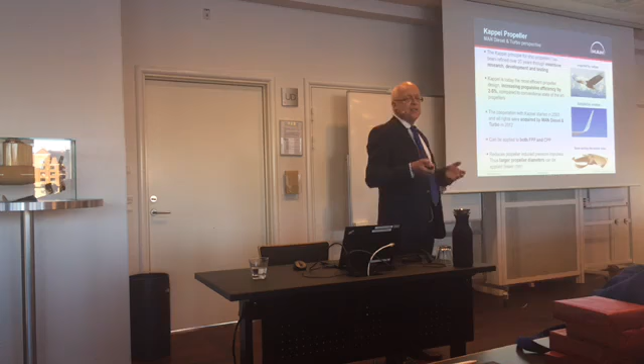I think one thing worth mentioning from our point of view is that until 2010, we were solely focusing on CP propellers. We were not on fixed pitch propellers. So that was also a way to get into the fixed pitch propeller. If we had come with a conventional fixed pitch propeller, it would be so hard for us to push through. But with the Kappel propeller, that was absolutely the right time, the right invention and the right product, I'm sure.

It has been mentioned here before that the pressure impulses, it was shown also by one of the applications from Kappel, that we would have lower pressure impulses, which can then be translated into an even bigger improvement in efficiency. And this is done by going for less tip clearance and bigger propellers, and that would be a secondary effect, you can say.

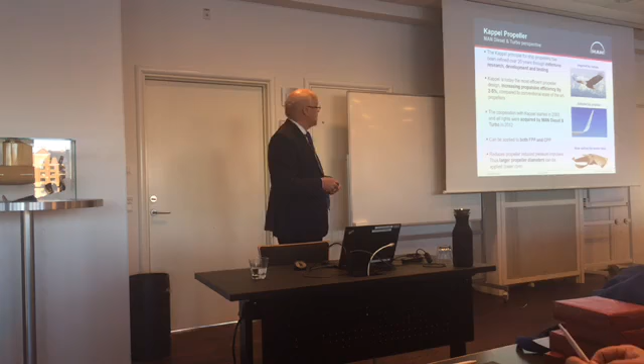This about the CLT propeller can be explained by equations, as shown by Paul here before, or you can take some kind of an analogy. Most seem to be familiar with the aircraft, where you have the lift distribution on the wing. And as we also saw, the winglets are coming, and what they are doing is actually reducing the loss of lift on the wing. In aircraft theory it's called induced drag, but it's actually not drag. It's a loss of lift, and the winglets are preventing that loss of lift.

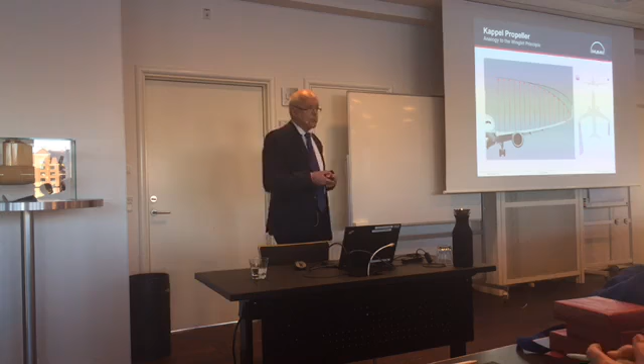And that can be seen also as vortices being shed from the propeller tips, or the wing tips in this case. And that analogy we use the same way for the basic principle here. The lift distribution will be such that you would have more lift for the same diameter and blade area ratio.

Then comes this question about the geometry. We have to communicate our geometry to the manufacturers of our propellers, and I can tell you this is a problem every time. We have manufacturers here in Europe, and we have some in the Far East. And first, I can tell you, it takes 2 days to convince them that it's a special geometry. Because they say, okay, why can't we just combine it with a skew and with a rake and everything? Why can't we make the same geometry? But the geometry is completely different.

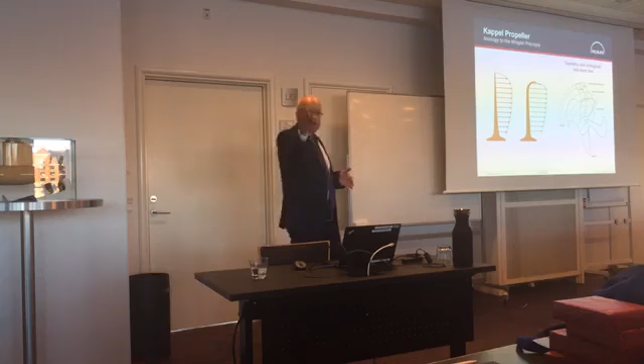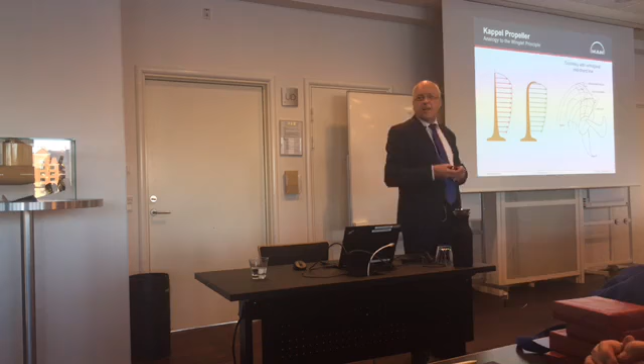As already shown, it cannot be combined with the usual means as with conventional propellers. So, after 2 days sitting with a Japanese or a Korean or a Chinese, they finally figure out that's the case. And if you look at the geometry, you see, of course, a conventional versus the CLT propeller. The difference, as we already know now, is in the tip region.

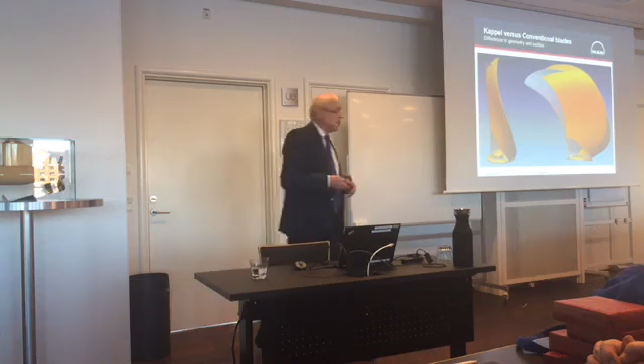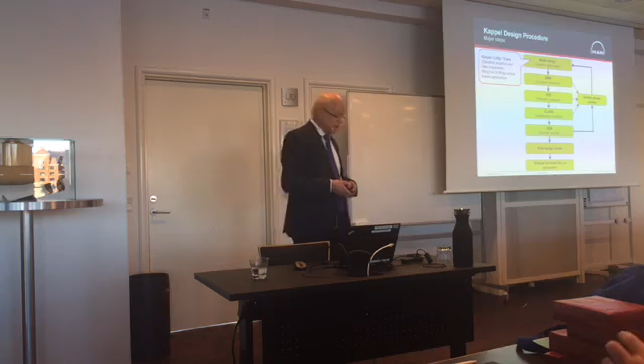Then to the design procedure. What you see here is a flow chart of how we usually do it when we make a design. First of all, we have the blade optimization, which is step number 1. We have a number of software programs that are taken over. LiftP and Trace are some of Paul's programs, which Kappel also used. Then we made ourselves a Casper program, which is a geometry input file, so we can very fast generate different geometries. In principle, you give some input parameters, and out comes an optimized lift distribution, an optimized propeller.

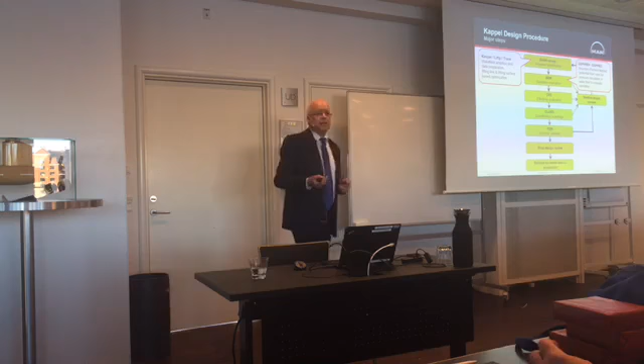The next step is then the S-Pro program, which was also shown by Paul, which is a boundary element method for potential flow. But the main purpose from our side is that we calculate the pressure distribution, and thereby also calculate where there is a danger of cavitation, and also the extension of cavitation.

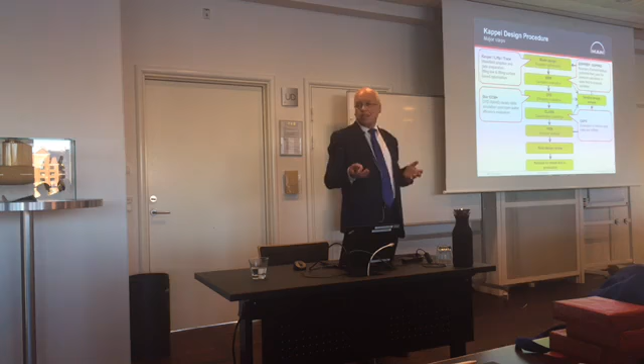Next is also the CFD side. We use the Adapco, I should say Siemens now, CFD code, mostly for steady analysis and open water efficiency at this stage. I'll come back a little bit to that. And finally, we have the classification society. That's mostly the basic rules for dimensioning and scantling of the propeller. That is done by, again, a software package we have developed in-house. Finally, there's the finite element design, where we actually put the hydrodynamic loads and the ice class loads on it, as you'll see in a moment.

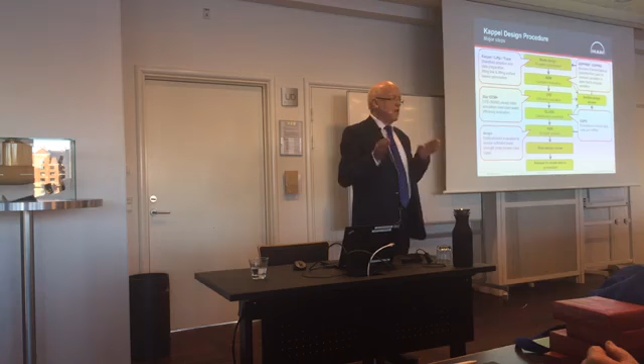And this is not a one-way passage. There will be a number of iteration loops, either breaking off here or here, and then we go through the different stages. And then it says release for model testing or production. In almost all cases, we will have a verification test at the very end. That is a self-propulsion test, open water test, of course, and cavitation testing also.

So, a bit about the SPRO program. We use it for cavitation analysis. There's not a cavitation model built into this one yet, but we just saw the first attempt made by one of our employees here, who's working on a PhD on a cavitation model for the SPRO model. And we're going to take that into use, of course, as soon as it's been tested.

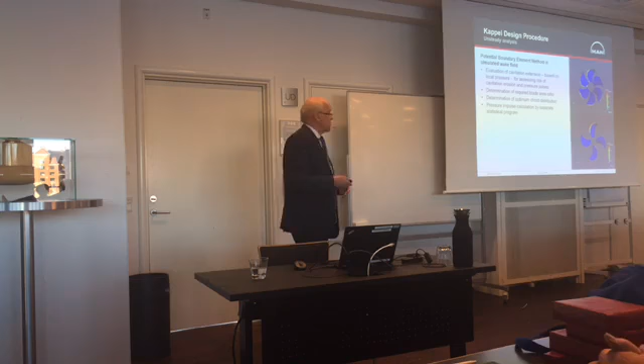Otherwise, we would use it to see if the cavitation is too much or too little. If it's too much, then we have to increase the blade area ratio; if too little, then it's the opposite, vice versa. It also gives a good idea about the chord distribution. You can move the chord in such a sense that you get less cavitation with the same blade area ratio. But the pressure impulse is still calculated using a statistical program. That's a program we've had for many years, which includes a number of modifications from our side.

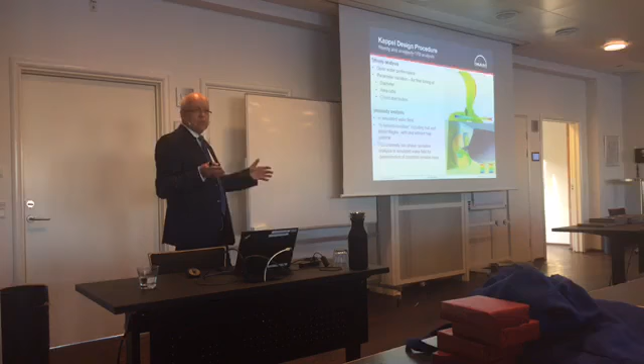CFD, as I said, is mostly steady state. We use it for open water and in the design phase, and we use it to fine-tune some of the parameters like the diameter. Typically we would have a specification that gives a propeller diameter of a certain dimension. But at this stage, we have all the information which we do not have when we first size the propeller. So we actually see whether a bigger or smaller propeller diameter would give an additional improvement.

And then we go back to the customer and say, okay, we would propose that you increase the propeller diameter by 100 millimeters, then you can gain X% in efficiency. So that's a part of it. The same goes for the area ratio, mostly from a cavitation point of view, and again of course with the chord distribution.

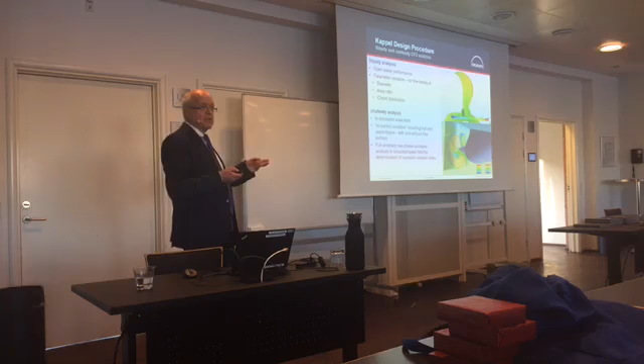The unsteady analysis. There are two ways we use it. One is with a simulated wake. This is a method actually devised internally in our company for how to apply a wake field. That's a problem with CFD calculations. But we have a method, and we use that in the design, especially to look at flow details in the tip region, or wherever we find it of interest. We could also have a complete behind-the-hull setup, including appendages like the rudder, and it could also include some kind of upstream flow devices.

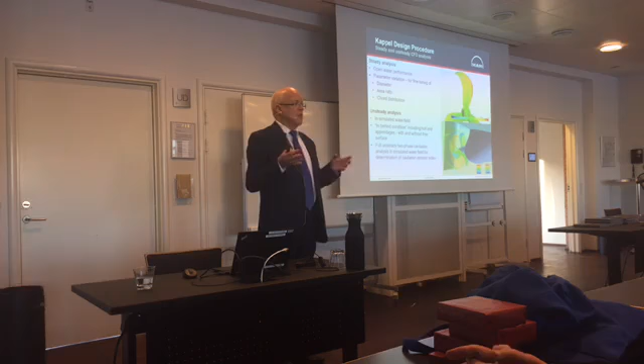And finally, we have an unsteady two-phase cavitation analysis, which is also done in a simulated wake, for determination of the erosion index. That is the best tool I've seen so far in determining erosion. It gives a clear indication of whether erosion will happen.

Finite element calculation is the next step, and there we have to consider both the hydrodynamic load and ice loads. The design of propellers and propeller blades is not from a static point. It's a dynamic component with dynamically varying forces. So you have to consider fatigue. If you look at the stresses in the blade, the maximum stresses from a static point of view are only something like 1/10 of the tensile strength. So it's a pure fatigue analysis we make from the hydrodynamics.

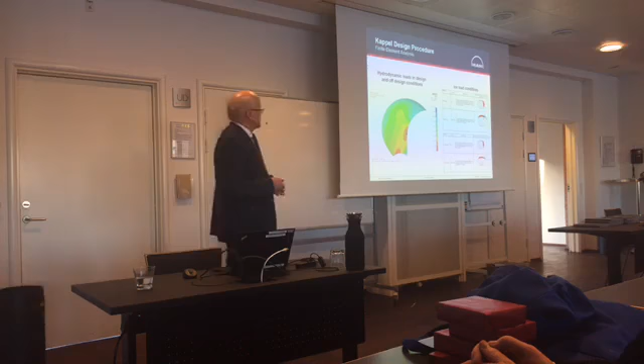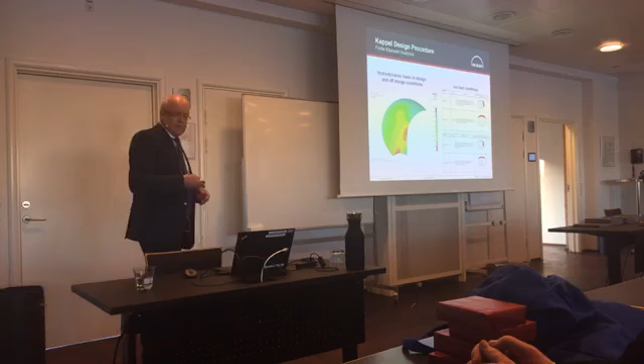Same goes for ice loads. Most of our propellers actually have ice class, so we also have to fulfill these requirements, which are set by classification societies, with different ice loads depending on the load cases. So in principle, having satisfied all our conditions for the design, we are ready to go to testing, and after successful testing, we go into production. Here there is a standard, ISO 484, which governs the whole manufacturing of propellers.

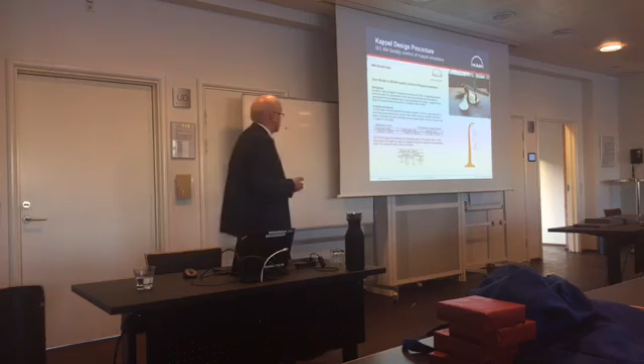However, that is based on conventional propellers. So first of all, we had to come up with our own solution, and we did that by issuing what we call an amendment to this ISO norm. And not only that, we have also supplied our manufacturers with a software tool where they just input their measured values, and then it immediately measures them against the ISO norm and our correction to the ISO norm.

After working sometimes with a Kappel propeller, we found that it could be combined with some other efficiency improving devices, actually quite successful. Some years back, we looked into what could actually be of interest here.

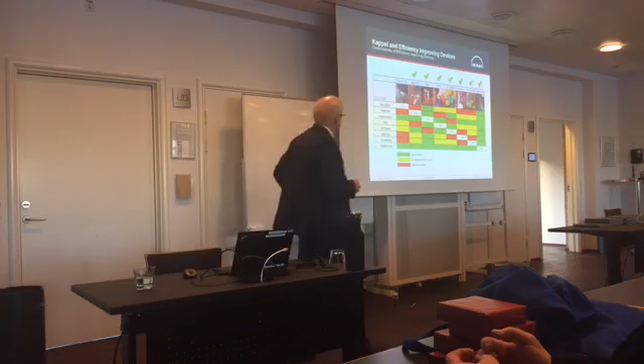As you see here, we practically tried them all. We still miss this post-swirl fins, but the others we have tried also in model testing and full scale as well. If you look in the diagonal here, you see the expected improvement in efficiency by combining the two. Looking especially at the copper color and the green color, that will be an indication that it goes actually well with most of them.

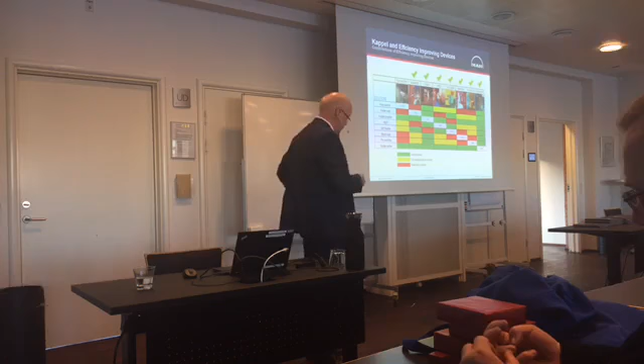So when you do this kind of combining of efficiency improving devices, you should ask yourself the question: first of all, can they be combined? Secondly, can you then just add the efficiency improvement that has been given by, let's say, the inventor or the manufacturer of these improving devices? And a good sound principle, I think, is to tell yourself: don't try to recover loss more than once.

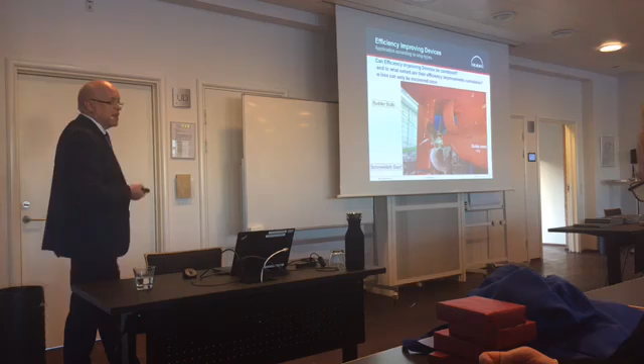So we have seen this picture you see here. It was probably given by a naval architect from a German shipyard once. He said, see here what we tried on the last vessel. Yes, I said, but this is our propeller. Yes, I know, he said, but you never told us you fitted those efficiency improving devices. So of course, this is a lesson to be learned: you really have to work together with the naval architects and the propeller designers in order to get the full benefit.

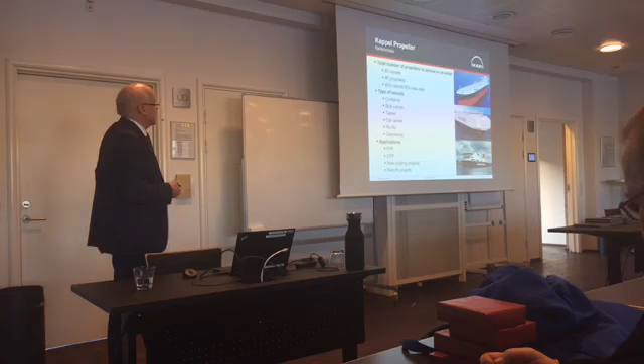Let's take a look at the number of new build cases, just a number of them. Here's first of all the current status as of today: we have now 85 vessels equipped with Kappel propellers. Some of them are twin screws, so the total number of propellers is a bit higher. Interesting enough, I think, is that 65% of them are going into retrofit and only 35% into new build.

As Carlo already mentioned, we have tried quite a number of different kinds of vessels, and the applications are actually both fixed pitch and CP propellers. The first reference I'll mention here is a chemical tanker.

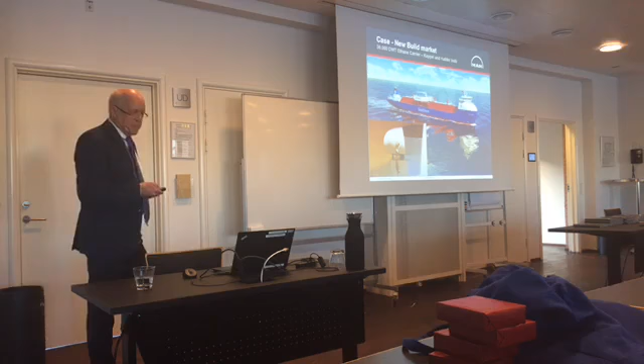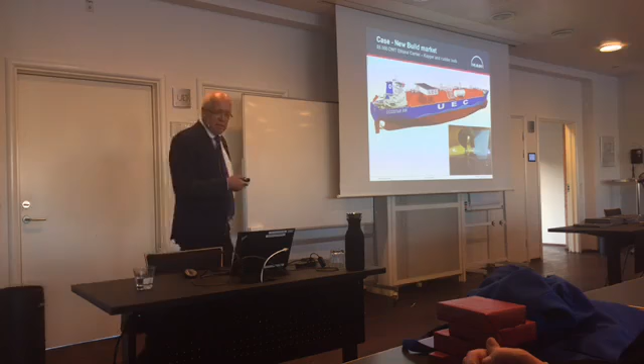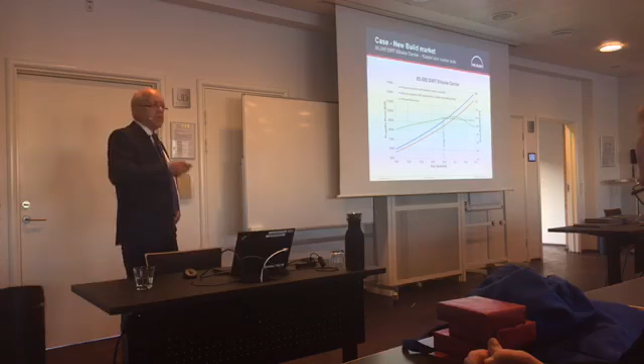The same ship owner has another series which is larger. Actually it's an 85,000 deadweight ton carrier, where the other one was 36,000. Same picture here: we have an improvement of 6.3% at a slightly higher design ship speed. But this is of course a combination both of the Kappel propeller and a rudder bulb and a twisted rudder in this case.

Ro-Ro case, which is a Ro-Ro ferry built at FSG in Flensburg. This is a twin screw vessel.

The retrofit market, which you saw before, is actually the biggest so far. We have first a couple of container references. One is for the Greek ship owner Danaos.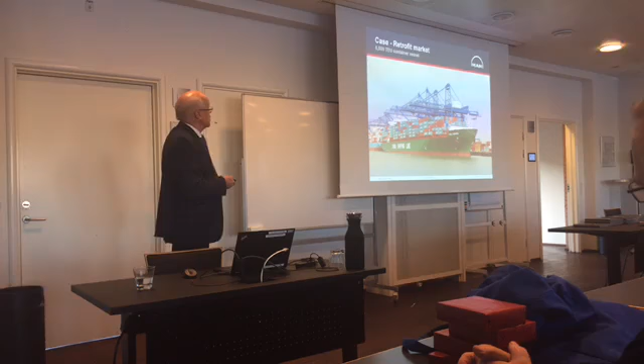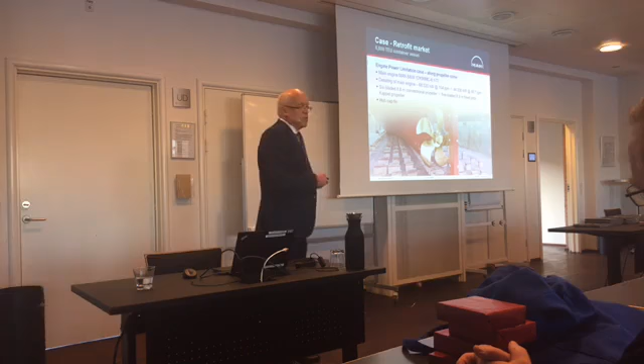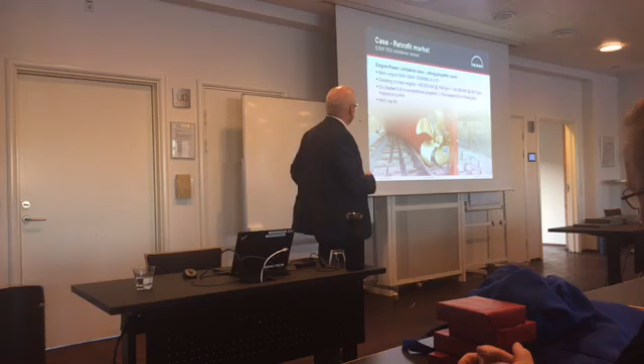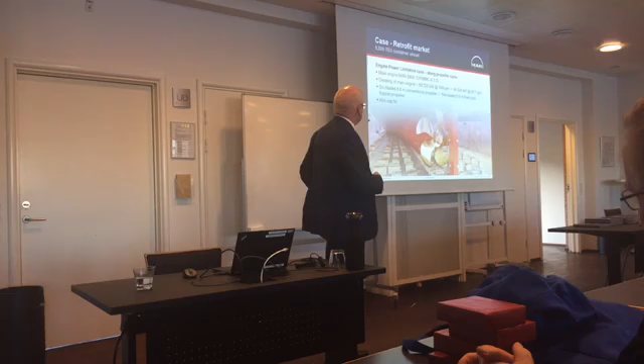This gives room for improvement. It makes it possible to look at the optimum number of blades and the optimum propeller diameter. In this case, we went from a 6-bladed 8.8 meter to a 5-bladed 8.9 meter. On the request of the ship owner, he also wanted to include these propeller boss cap fins, as you can see sitting here.

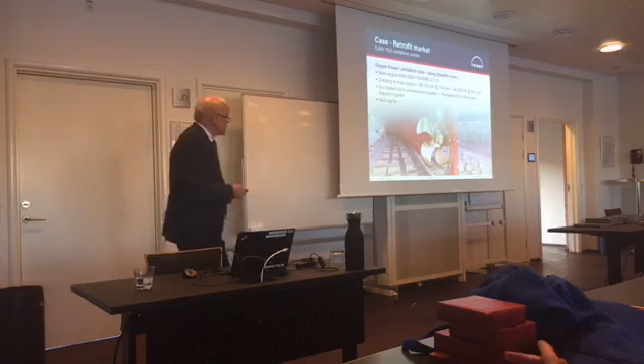So this is how the de-rating is actually done. The originally specified MCR is up here at the intersection. What we do is lower the power along this line until we find a power that will fulfill the speed requirement of the vessel. The big benefit here is that your emission certificate will still be valid, so you don't have to go out and do new emission tests to fulfill the required IMO requirements.

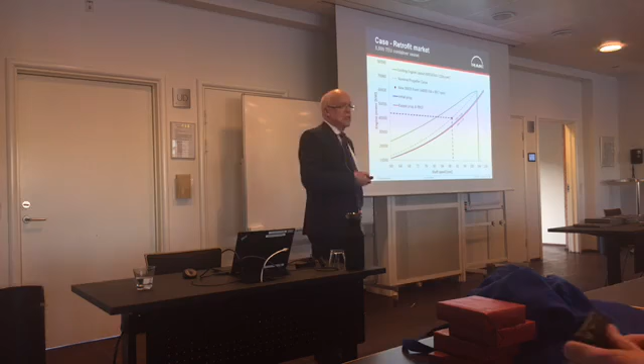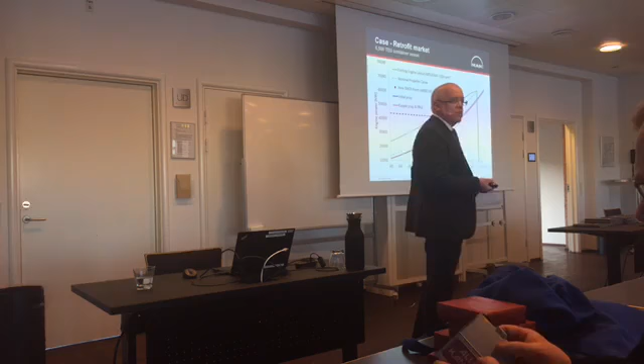Another thing we're interested in with a fixed propeller is what we call the light running margin. We have a certain margin up here, and also one here at the new design point. There used to be a fight between engine builders and propeller designers over how much that should be. Propeller designers prefer a low light running margin because that means higher propeller efficiency, while engine builders would like a bigger margin. So the latest recommendation from our company is that it should be between 4% and 7%.

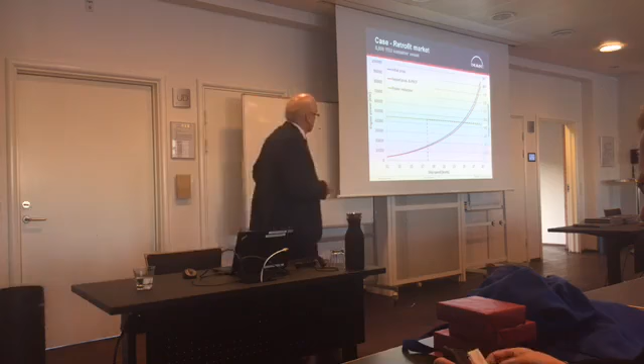But here we are now with this one. Again, taking the same type of graph, we have a very flat optimum, more or less 5.7% in the whole speed range, also confirmed by the sea trials, by the reduction in speed.

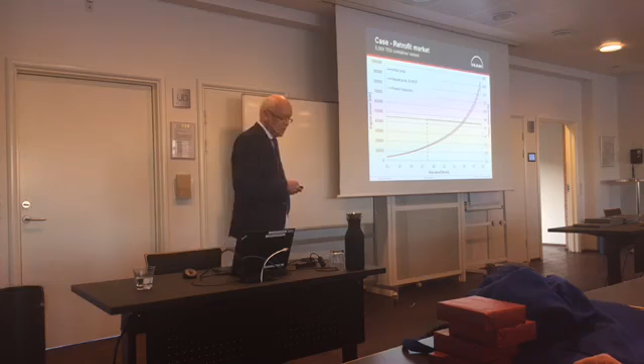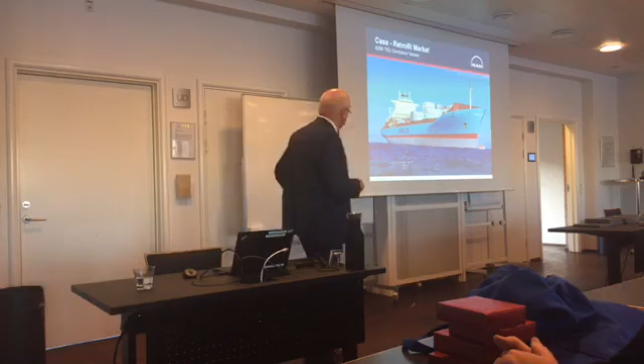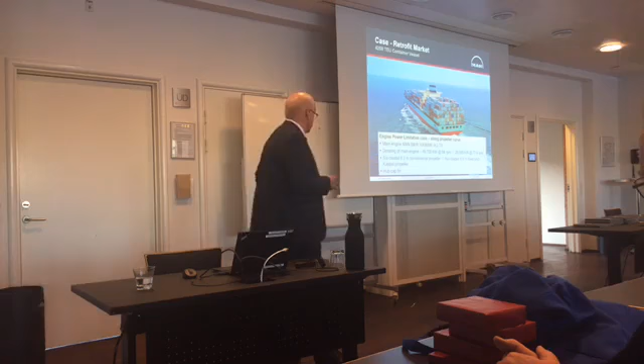Another container vessel, should be familiar to someone in the audience here tonight. Again, the same: it's a power limitation case along the propeller curve. We have a 10K80 engine, derated from 45 to 26 megawatt, and the propeller rate follows the same. It had a 6-bladed 8.3 meter conventional propeller, now a 4-bladed 8.6 meter was selected. Again, here we have the hubcap fin.

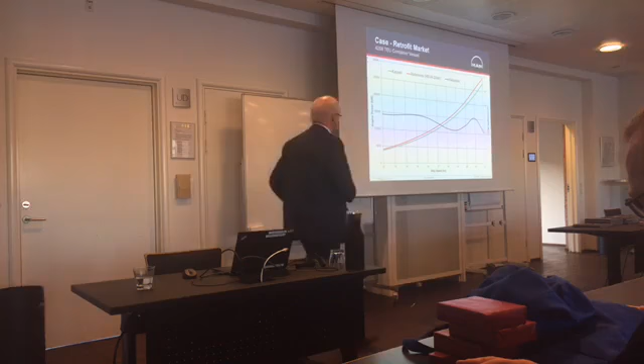So those were fixed pitch propellers. The next is the CP propeller.

It's actually two series of vessels. The first one is a 38,000 deadweight chemical tanker for the Norwegian ship owner Odfjell. They had 8 vessels in this first series, and they asked us to investigate what could be the possibilities for giving a more efficient operation.

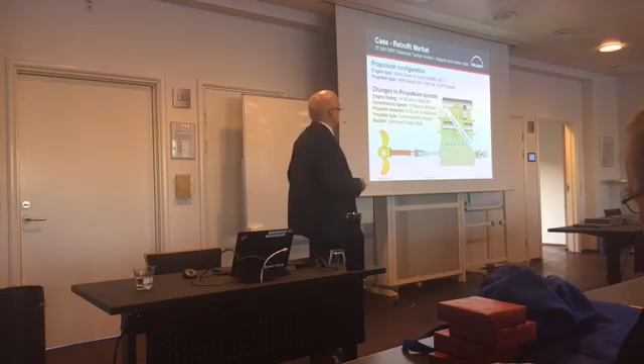You see here, it's again an MAN engine with our CP propeller, and they actually lowered the demand for power quite significantly. We went from 14 megawatt down to 6.

So what is really the point is that those engines drive on the front end through a gearbox what you call a shaft generator. That means they operate with a constant, what is called synchronous speed, of 117 RPM all the time, and all the maneuvering is simply done by changing the pitch.

This is also okay as long as you're close to the design point of the propeller, but if you do slow steaming where you just constantly reduce the pitch, then the propeller efficiency will drop off. So it's actually essential if you really want to have improvement that you also look at changing that synchronous speed.

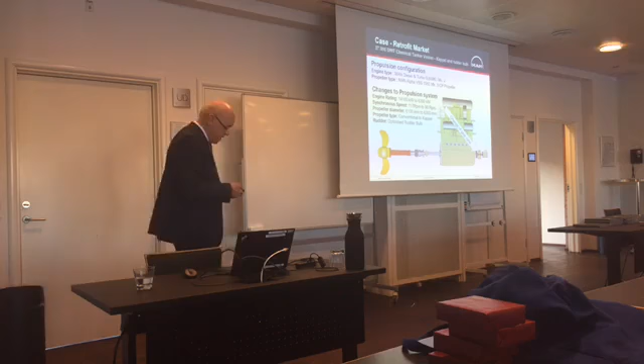So a part of the investigation, and also the change that was done to the total propulsion system here, was actually to change the gear ratio. So that went down to 90. And as a result of that, the optimum diameter actually went up from 6.1 to 6.3 meters.

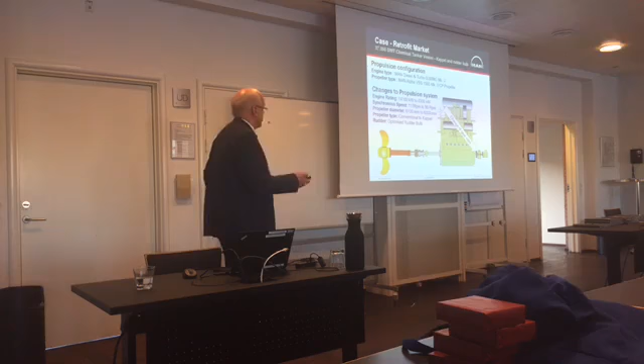We went, of course, again from a conventional propeller to a Kappel propeller, and we made one of our wake field optimized designs. Those are the figures you get out of this. And that is for the first series.

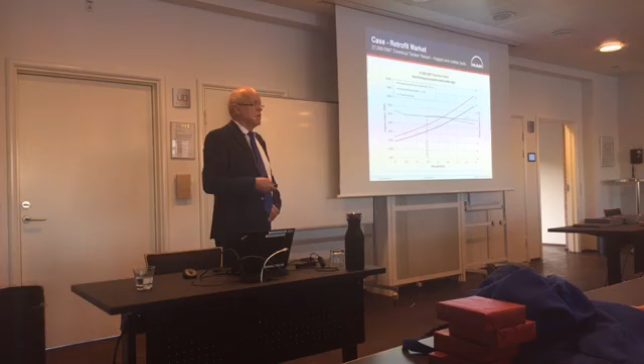Then there was another series which was slightly bigger. I can't remember how big they were, I think around 40,000. Exactly the same figures. And what's most interesting is that you can actually go on the net and have the ship owner evaluate those figures. In full scale, he claims he has more than 20% improvement in fuel.

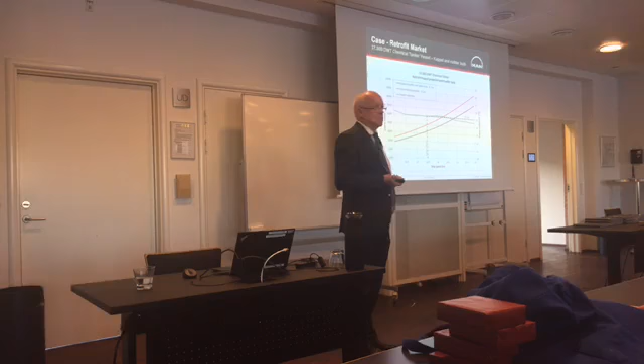So, nicely satisfied customers, I would say.

Yes, the last case I brought here was an oil tanker, which again, this is a rather old design, but it still shows the potential of what can actually be achieved.

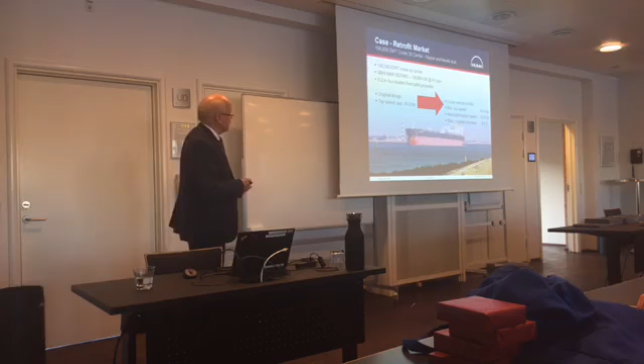Here again, this was one vessel that was designed for 16 knots. You see, they did not use that at all. Instead, they said to us, we have an optimization speed that is now 12.5 knots, and we also have only a requirement to have a top speed of 14 knots.

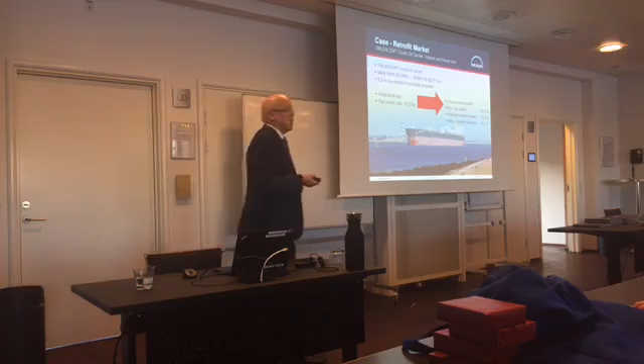What we always do when we have this kind of project is to look into how big can the propeller diameter actually be. The bigger, the better, the more efficient, if you can get the right revs on the propeller. So again here, we could actually substantially increase the propeller diameter from 8.2 to 9 meters.

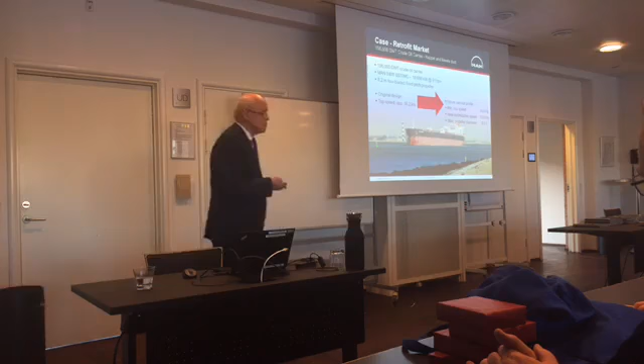What we did in this case was that first we were asked to make a feasibility study by the ship owner and find out what the potential was. So we went through and said, okay, we'll take not only a case looking at how much the efficiency can actually be improved, but also look at the whole propulsion train - the mechanical side, the vibration side, and everything.

Out of this came that we suggested to de-rate the engine from 18 megawatt down to 10. We went from 91 to 68 RPM. We went from a 4-blade 8.3 meter to a 9 meter fixed pitch Kappel propeller.

But during our analysis, we soon found out that there was actually a problem with torsional vibration. This is something very, very essential when you have two-stroke diesel-driven propellers. You have high stresses in the shaft, so you have to be very careful.

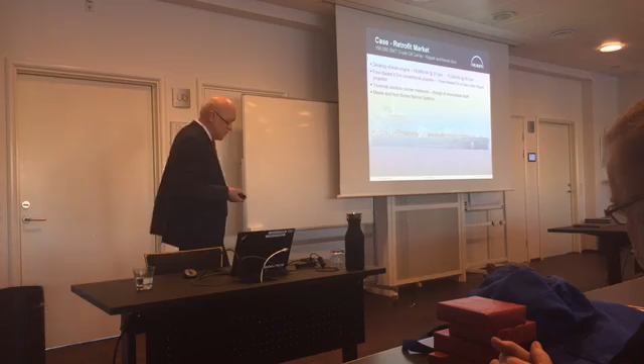So we told the ship owner that to overcome this problem, we need to change the intermediate shaft - you have to include the cost of a new intermediate shaft in order to get this done. That was a part of the investigation, and the decision by the ship owner was that he'll take that cost as well. So, and then

we have a cooperation with Becker Marine Systems in Hamburg on a number of topics. One is the rudder bulb, and this project here shows again that the Kappel propeller worked well together with the rudder bulb.

So those are the figures our feasibility study showed, that we could gain 17.5% at the optimization speed of 12.5 knots, and at the maximum top speed of 14 knots, there will still be 16% improvement. It's very easy to claim figures. It's more difficult to prove them.

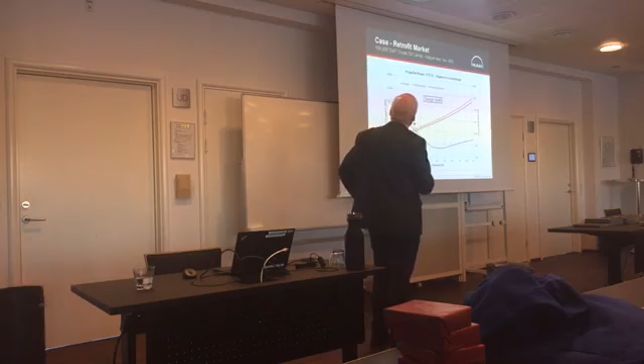So again, it comes with a typical way of doing that. Nobody really believes in what's going to happen when the ship is being put into operation. The way in this business is to prove it by volume testing. This is how it works. So, okay, we take it step by step. Here we have first the conventional.

I have to mention those ships were old ships. So there was no model available. The existing conventional propeller was not available. There was no CAP propeller available. So we had to start with building a new model of the hull, a new model of the existing propeller, and then also a model of the CAP propeller. And then we did that for a number of drafts. I've only taken here the design draft.

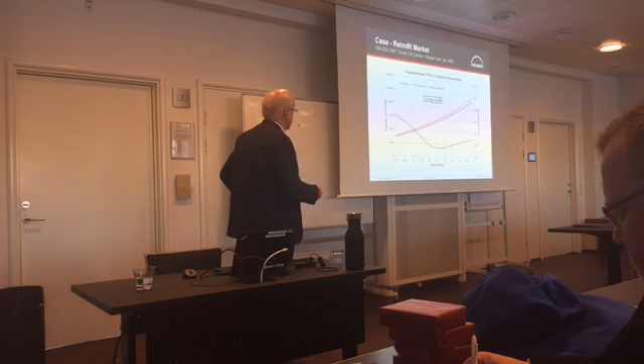The first step is to change the CAP propeller with the conventional. And here you see again the same type of curve. We are between, let's say, 5.5 and 6.5. And then our good colleagues from Becker went in, and they have a special procedure, first of all to design it, but secondly also how to test it and adjust the fins inside.

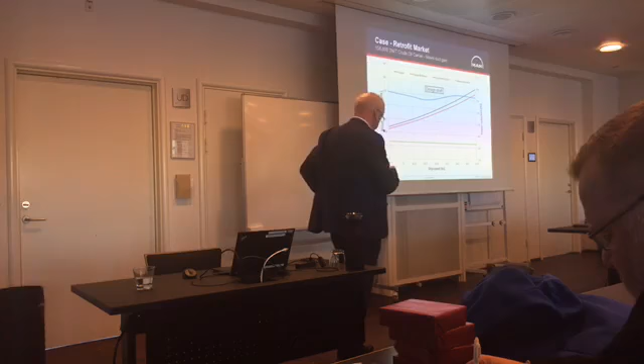And that is the next step. We have the CAP propeller here, we have the CAP and the Mewis Duct here, so that would give an improvement here in the order of that step of 7%. The estimation from Becker themselves was actually 3.3%, which is here. I'll come back to this a bit later, because there are different scalings.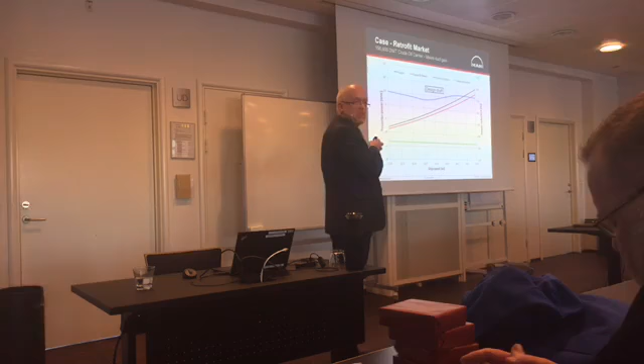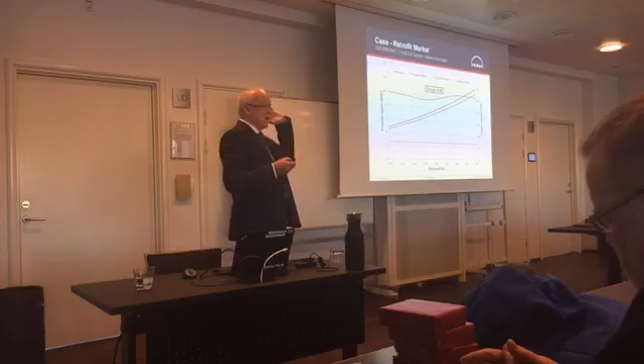Paul already mentioned a bit about scaling of the Kappel propeller with the tip pressure. But the ITTC has allowed Mewis Duct makers to use a special scaling when it comes to the Mewis Ducts. So this would always give them some benefit. We have tried ourselves also at the last ITTC conference that was here in Copenhagen, I think in 2014. We made a paper and tried to convince the ITTC, but so far we have been unsuccessful.

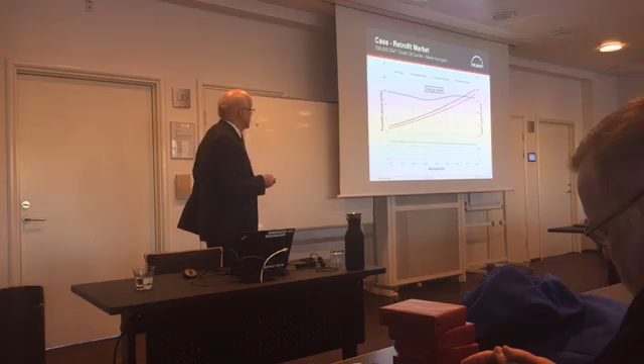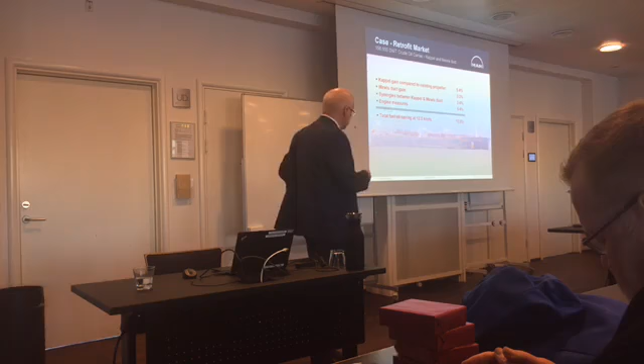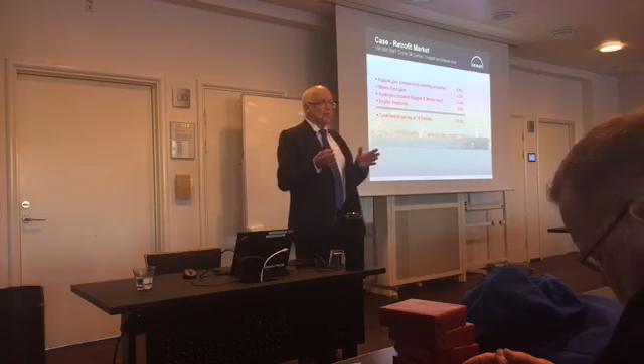That may come. But how we sum up this one is that now we are looking at the 12.5 knots. You have savings from the Kappel of 5.4%, Mewis Duct 3.3%, and then we call it synergies between the Kappel and the Mewis Duct, because who's going to benefit from this improvement in scaling? Is that the Kappel propeller or is that the Mewis Duct? That is a constant argument. So we put it as a synergy, so then you can always discuss how it should be shared. But the improvement is there, that's for sure.

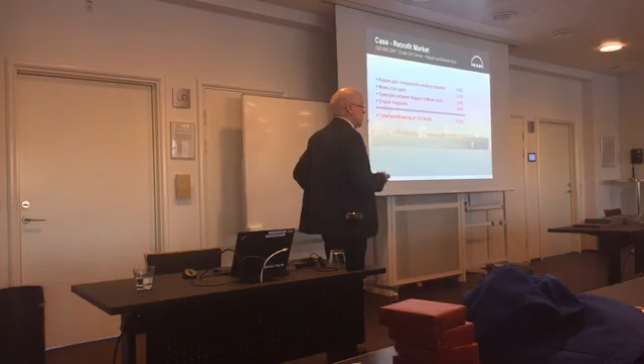And not to be forgotten in this case, on the engine side there were, of course, a lot of changes made. Also something was talked about the intermediate side, but also on the main engine side, I think the firing pressure was increased. The number of turbochargers was also decreased. So all in all that gave also a significant improvement. But somehow it luckily happened to be exactly the same figure as we predicted at the beginning.

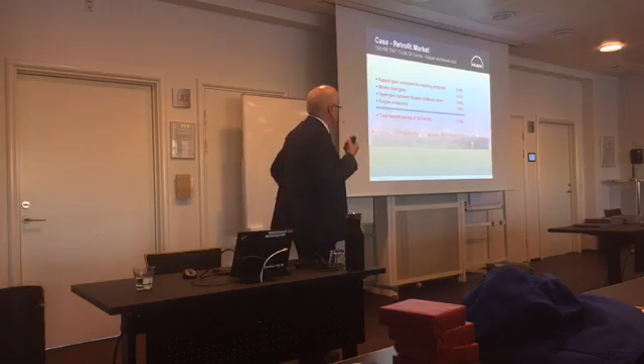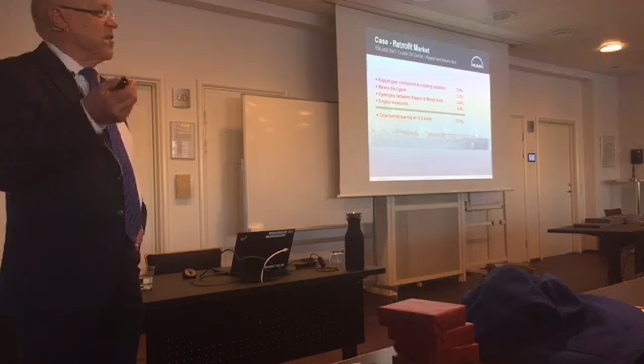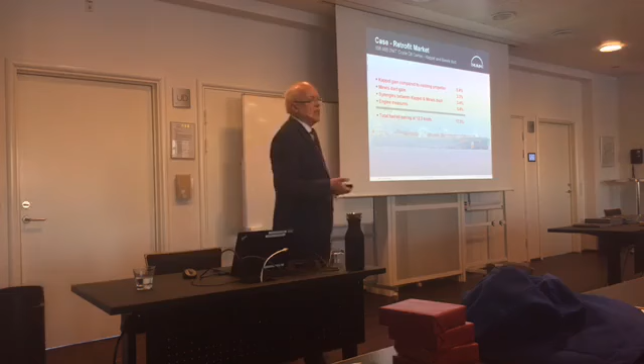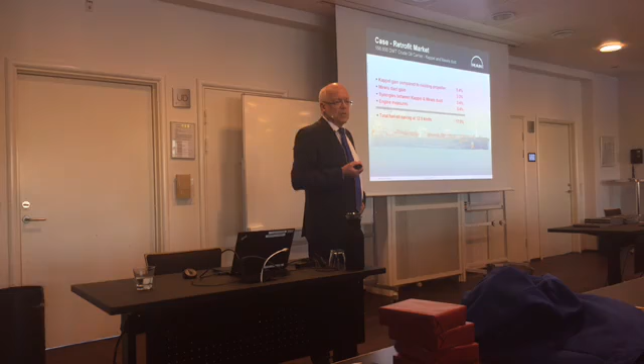I mean, by those cases I have shown here, I think at least I'm happy when I talk to the management that I gave this advice, we should buy this invention, invest into it. And I'm also proud to be a part of this invention, even though I'm a latecomer, if I may put it that way. So we at MAN look at this as our future business. When it comes to fixed pitch propellers, it's definitely the way that we can succeed. And hopefully that will lead to a lot more orders.